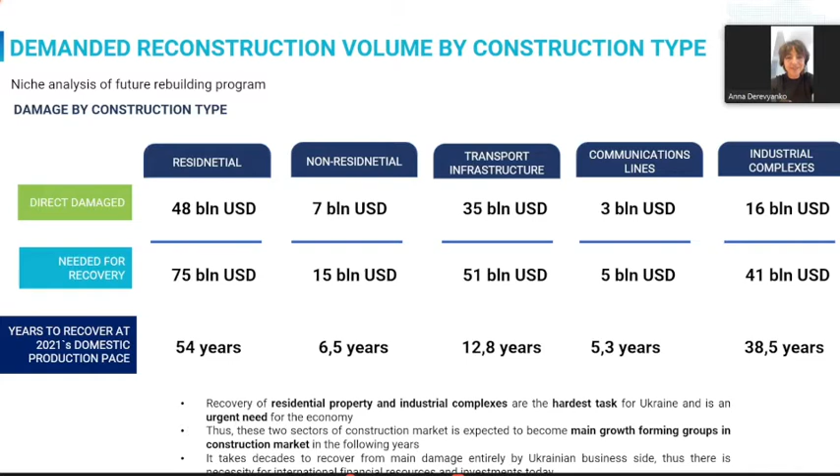I already mentioned the value of the direct damage that you can see on this slide, and the years needed to recover at the domestic production pace. For the residential sector, it takes 54 years at the current pace. That's why we will definitely require international support, international investment, and international companies to be involved in such recovery.

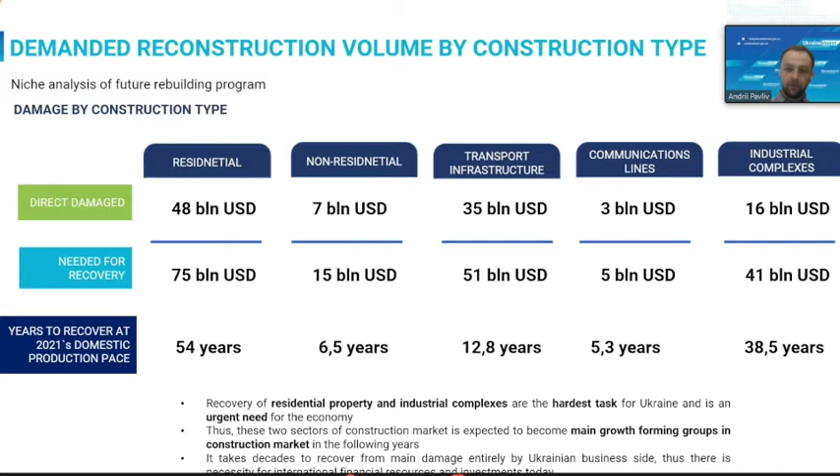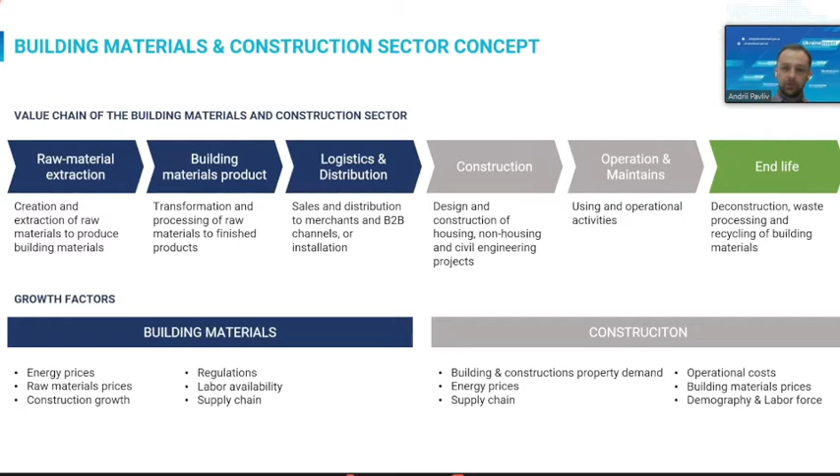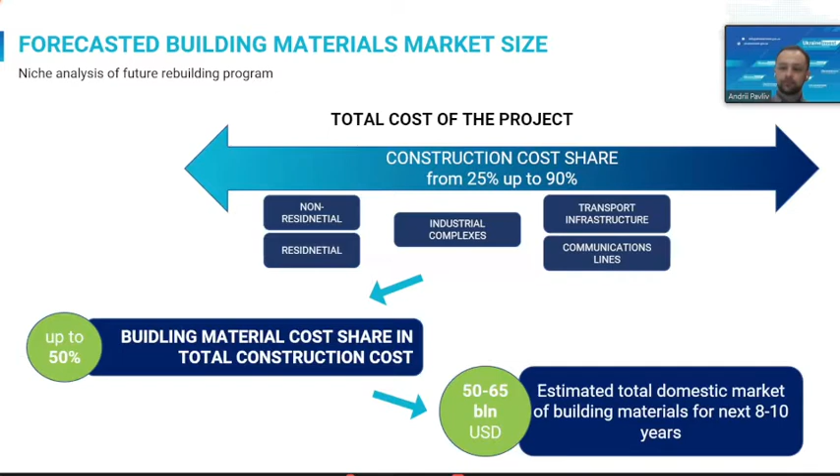Talking in general, the demand in investment is predicted by the market size of the sector. Depending on the type of construction, the direct construction cost of the project is between 25 and 90%. Within this cost, the share of building material cost could be up to 50%. According to estimates, the total domestic market of building materials for the next 8 to 10 years amounts to more than $50 billion. Considering all these facts, a significant amount of private investment and financial aid in this sector will be needed in the near future. Reliance within the rebuilding process will be on domestic producers located closer to the market, and the key focus in reconstruction projects will be on building material producers.

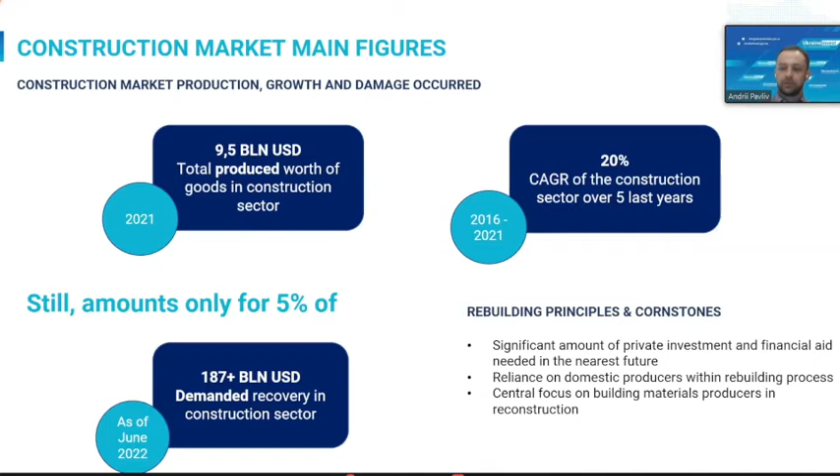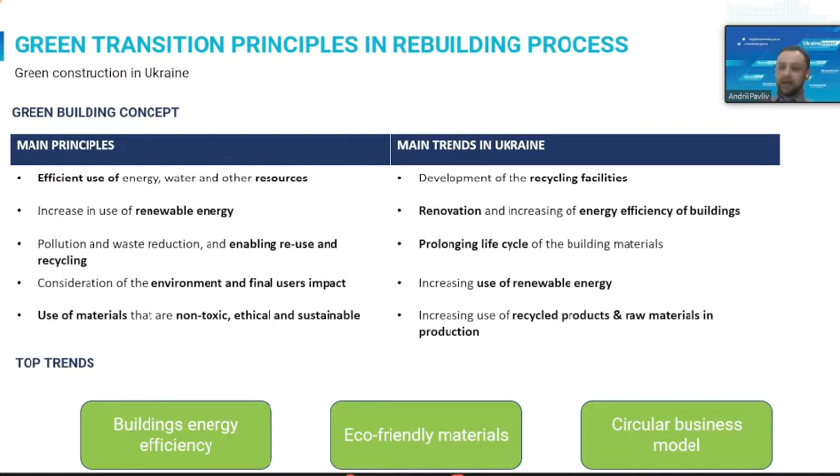Finally, the last but not least point in my presentation: it is important to consider in the future rebuilding program the main green transition principles and trends, which should correspond to the circular economy and sustainable development goals. Namely, energy efficiency, renewable energy, waste and carbon footprint reduction by enabling reuse and recycling, the use of non-toxic, ethical and sustainable materials, and prolonging the life cycle of building materials. This is a very short presentation of the building material sector and construction.

I hope that the next presentations of our next speakers, next companies with their real investment projects, will be much more interesting. Thank you for your attention. Thank you so much, Andrii. I think it was an absolutely clear message that yes, we have lots of potential in the construction area, but we would like to resolve and open this potential by means of locally produced construction and building materials. So it will be very interesting to listen to the next speakers with real investment projects.

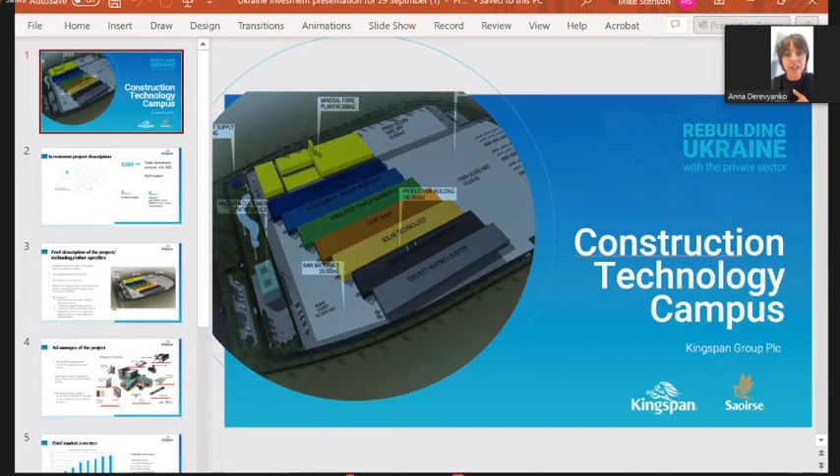I would like to invite the first speaker to the floor, Mike Stenson, the head of Department of Innovations of Kingspan. I'd like to make a short intro: the company Kingspan has just recently left the Russian market, and you plan to build a technological hub of construction materials in Ukraine. The volume of your investments, from what we understand, would be around 200 million euros, and you plan to implement it within the upcoming 5 years. It will be interesting to hear the details of your plans, and what potential there is for cooperation in your project.

Okay, hello everyone. Can you hear me? Yes, okay very good. And I hope you can see my screen as well. So my name is Mike Stenson, and I work as the Group Director of Innovation and Future for the Kingspan Group.

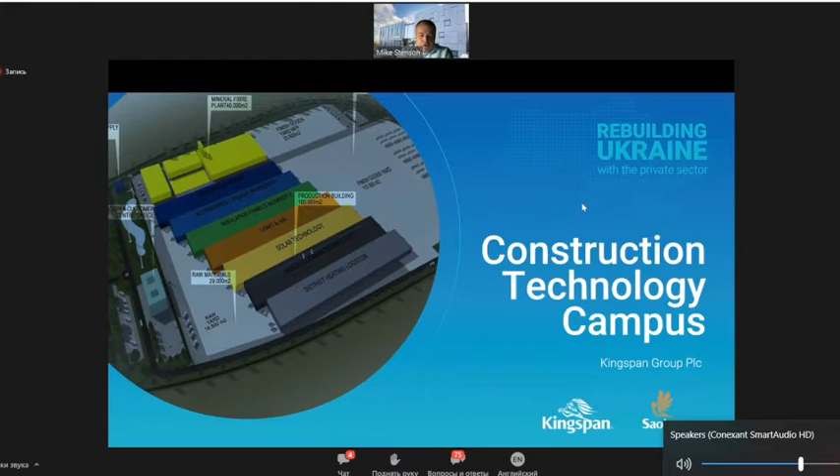Just a few words about that before I get into the presentation proper. First of all, internally we're calling this project Project Saoirse. Saoirse is a Gaelic word in Ireland which translates as, I suppose, freedom. So it's a project that's of extreme importance in many dimensions to Kingspan.

So a little bit about Kingspan before I change the slide. We're a global building materials company, headquartered in Ireland, founded about 55 or so years ago. We operate in more than 100 countries with 220 manufacturing locations and 20,000 employees. And we are the leading provider of, among other things, insulated sandwich panels that are used by logistic centers and logistic buildings all over the world.

We've had a sales office in Ukraine since 2008, and we cooperate on many projects there. We have a number of divisions with different product offerings, and all of those businesses have current capacity in Eastern Europe. Over the last year, it's become obvious that there will be requirement for additional expansion of capacity over the next 3 years. So back in March, April, May, the board of directors took a view on this and decided in May to approve an investment in Western Ukraine.

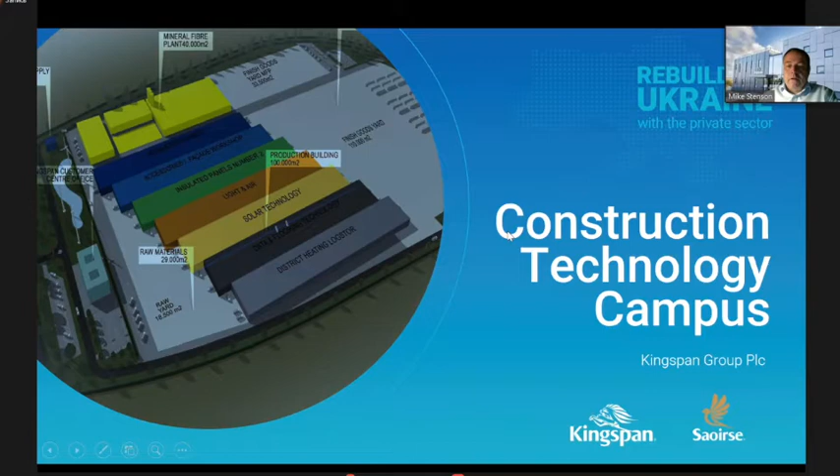In the next few slides I will explain a little bit about what's involved in that. So this is a project that... it does move, it does not move... no, maybe, oh yes, yeah.

So the project will be in the region of somewhere between €200 and €250 million. It'll be mainly self-funded from our own resources. It's going to be focused in a specific area in terms of Western Ukraine, around the city of Lviv. Based on the calculations we have done, there's a 5-year payback period, and probably it'll take us up to 5 years to fully implement it. But this could go faster. It depends, and it'll really be driven by end customer demand, both in Eastern Europe and in Ukraine.

A brief description of the project: we're calling it a construction technology campus in Western Ukraine, with 250 million euros of investment. It'll be a 50-hectare site close to the city of Lviv. We will focus on exporting back into the EU high-performing building materials that ultimately will reduce the carbon intensities in buildings today. We know from external agencies that buildings are responsible for about 40% of all CO2 emitted, and we have a very clear innovation program around decarbonizing the product set we offer today, as well as working on new materials and technologies that are zero carbon by definition. There's lots of stuff internally going on in those areas.

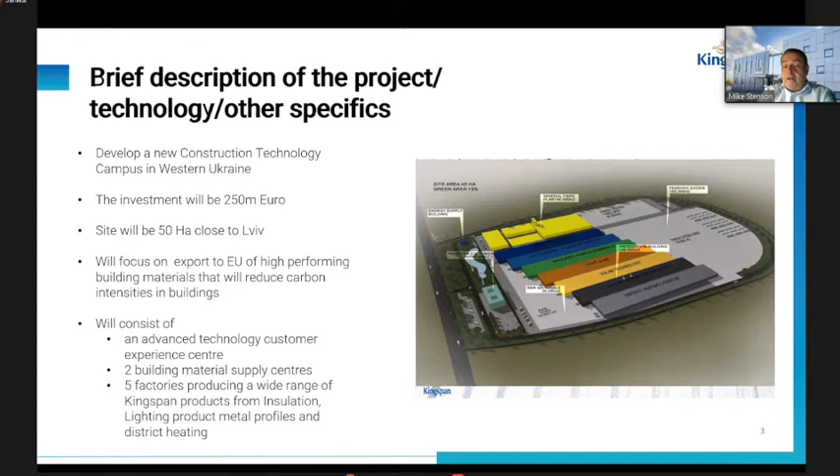Effectively it'll be a combination of our products, and we're working on a very interesting project around including the co-development of a solar solution directly into our roofing panel. It's our intention that we would make the solar modules. We're doing a joint development project on that at the moment, and the idea would be that those solar modules would get manufactured on that campus as well.

They're urgently looking for capacity, so they'll probably be the first business located in that new technology campus, and they need a lot of space and lots of big pipes and so on.

We have a big business around what we call light and air, which is about how we get natural daylighting into buildings. We've lots of technical insulation for pipe work and other technical aspects. We have this power panel, which is integrated solar onto roof, and for data centers a whole selection of products around data and flooring.

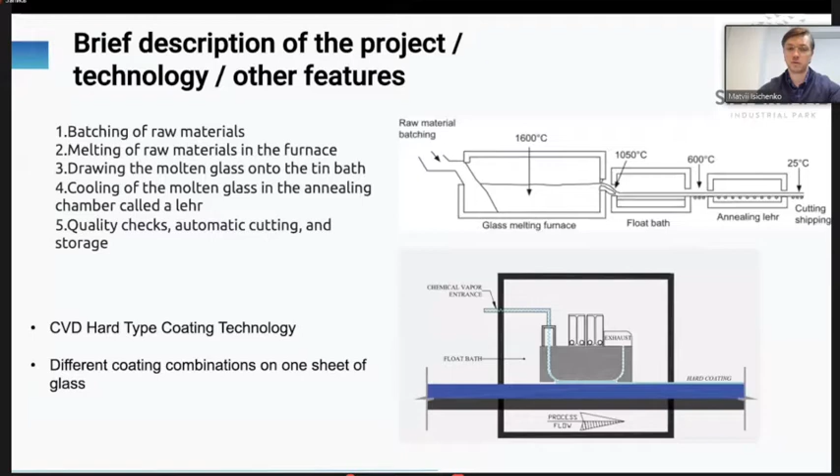Each type of coating has its advantages and disadvantages, but the use of CVD coating is distinguished by its long-term use, reliability, and faster return on investment. We are considering an innovative CVD coating system that allows you to combine coatings of different types on one sheet of glass. This means a significant improvement in glass performance.

So, the total investment amount will be around 195 million euros, which includes 19.5 million euros of own investment, which is about 10% from total.

Following the account scenario, which our team researched and which has been proved by the producer of machinery, the internal rate of return that we get in a 5-year period is 10%. The NPV is 30.2 million euros. And finally, the EBITDA margin is 31%.

Out of this, we can get a payback period of no more than 4 years. The project implementation takes 2 years at most from the moment of first payment, with a particular scenario of implementation stages: starting from searching for investment, going to construction of buildings and structures, as well as purchasing and manufacturing the technological equipment, followed by determination of the optimal raw material base and labor market, and leading to the supply of energy carriers, finishing with the production tests.

The structure of glass production by types. The variety of glass types and coating combinations that is possible to produce is fairly diverse. For market research, we chose the most common ones that the market is used to.

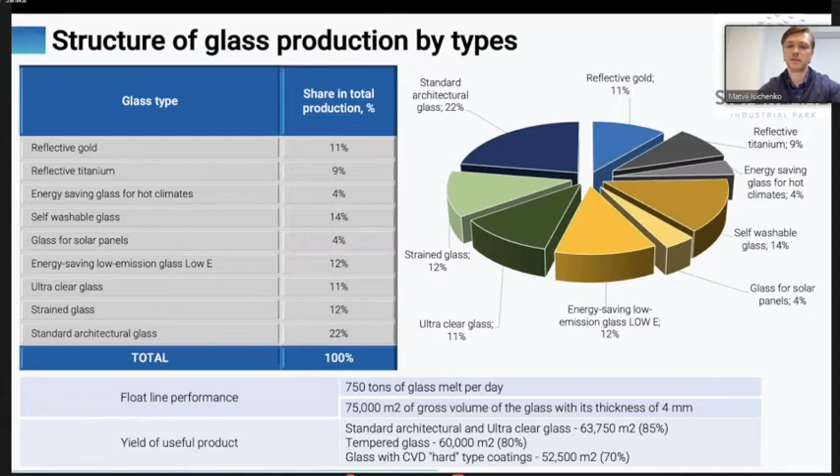All the calculations were made by our team with the float line performance at 750 tons of glass melt per day, which is 75,000 square meters of gross volume of the glass, with its thickness of 4 millimeters. This is a possible maximum, as the coefficient of efficiency is 1, so there is no timing lost on human factor. Although the yield of useful product has a different and particular value for each type of glass, depending on the industrial waste.

A couple of words about the project benefits. Starting from the absence of competitors on the Ukrainian market at all, and their small number on the European market.

The second one is the placement of our factory for the production of float glass on the territory of a new industrial park in the Mukachevo district of the Zakarpattia region, with direct access to cross-border cooperation with Slovakia, Romania, Hungary, and Poland. Such placement has its own priorities because of the proximity to the borders, which will contribute to the expansion of foreign economic relations and significantly reduce transport and logistics costs.

The modern infrastructure of the industrial park. The building area for the plant is about 19 hectares, which will allow for expansion for new innovative processes.

The third benefit I can mention is unique modern production technologies from the technical partner of the project, which meets global standards of quality, energy saving, environmental friendliness, safety, and long-term use. We work only with the best.

The equipment manufacturing company has more than 30 years of experience in the field of developing glass production and coating technologies. By choosing them, we receive constant support during planning, construction, commissioning of the plant, and application of equipment for the production of high-quality glass.

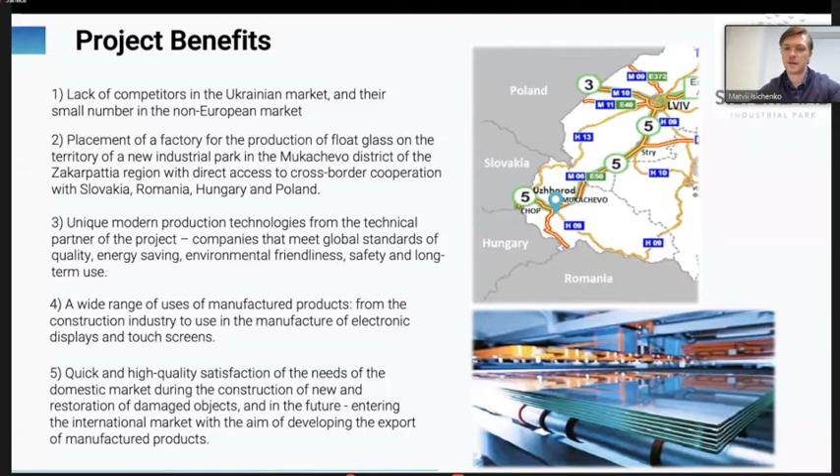In the future, the production of high quality as well as large variety of products will allow the company to become an exporter of produced glass and present Ukrainian production to the general public, providing the needs of the world market in flat glass for various purposes.

Just a quick overview of the market. There are around 50 to 60 manufacturers of double glazed windows and 300 to 350 window manufacturers in Ukraine. Before a full-scale invasion, Ukraine imported about 80% of its glass from Russia and Belarus. The war and the trade embargo against the Russian Federation has stopped these supplies completely.

Before the war, the Ukrainian market's demand for glass was around 28 to 30 million square meters per month, and our potential enterprise will satisfy at least 50% of the total need.

The growing trend to replace brick, cement, and granite facades and other building elements with stylish and colorful glass in residential and commercial buildings will also drive the growth of the flat glass market. The rapid development of the construction industry can stimulate the development of the industry and increase the demand for glass products.

Talking about the export volume and export growth potential, the global flat glass market will show growth until 2027. The size of the global flat glass market exceeded $105 billion in 2020, and GMI estimates that it will grow by more than 8% annually from 2021 to 2027, reaching $180 billion by the end of the forecast period.

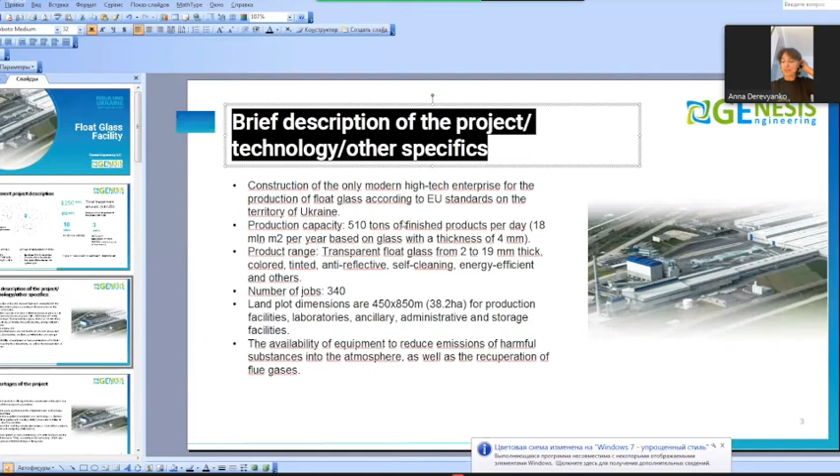Excellent. Our company today is engaged in developing a project to build a float glass facility in Ukraine. It will be much easier for me because the previous speaker told you a lot about all this, so I will tell you about our project in details.

The total investment amount is $250 million. The payback period is 10 years, and the project implementation period will take up to 3 years, taking into account the global situation with logistics.

Financial details you can see on the screen: IRR 11.28%, NPV $237.7 million, EBITDA margin 28%.

Our plant will have high quality modern production of float glass according to EU standards, and we want to be export oriented. Today we have quite a big lack of float glass in the world, and the expected growth is 8% per year.

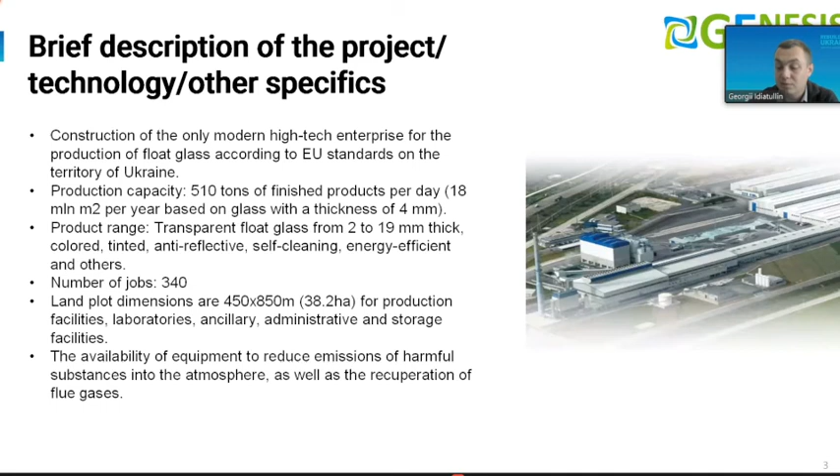We also plan to reduce emissions of harmful substances into the atmosphere, as well as have a system of recuperation of flue gases. This will help us decrease energy consumption, use energy efficiently, and reduce negative impact on the environment. What are the advantages of our project?

This is a professional team that will organize the construction of the plant and coordinate all necessary documents. Our key partners in this project include a comprehensive supplier of equipment and technology, a German company with experience creating similar production facilities both in Europe and the CIS countries.

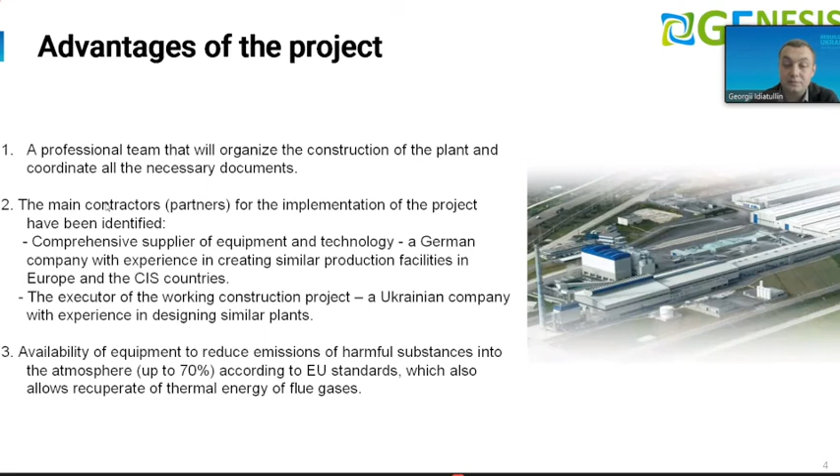The company that will implement this project is a Ukrainian company with experience in designing similar plants. Another advantage of our project is using equipment to reduce emissions of harmful substances into the atmosphere up to 70% according to EU standards, letting us correspond to EU standards for such plants and recuperate flue gases.

Brief market overview: right now $105 billion is the global float glass market volume. The Ukrainian market volume as of 2021 was $200 million, and it was depending on import.

The export growth potential is 6.5% in the EU, because right now there is a lack of such glass, not only in Ukraine but all over the world. Our key buyers are those who take part in building, those who need it for cars, and many other users. Glass is one of the three key components for building, including steel and concrete.

We plan for the first year not less than $40 million from exports of our products, and every year we plan to increase this.

As for our team, since 2014 we have been working in the sphere of engineering projects of railway rolling stock, and also supply of spare parts for passenger cars and metro cars. More than 20 projects of freight cars have been implemented, which include freight cars, railway cars, their systems, elements, and so on.